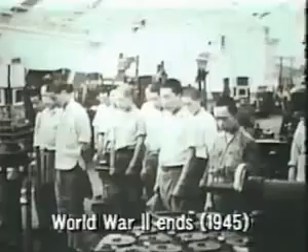After the war, Kiichiro passed on his dream to his cousin Eiji. He instructed Eiji to bring the company up to U.S. standards of technology within 3 years.

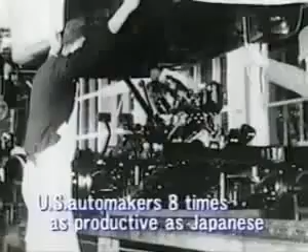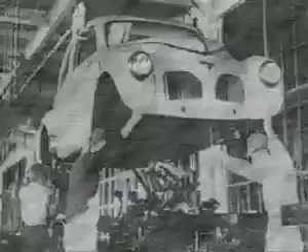That was a daunting task. U.S. productivity in automobile manufacturing was 8 times higher than Japan's, and Toyota was short of equipment and capital. So raising productivity was a pressing issue. Eiji assigned a machine shop manager by the name of Taiichi Ohno to develop a more efficient production system.

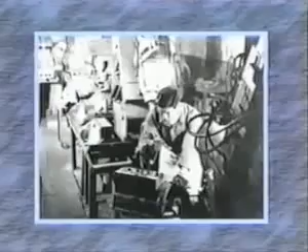The two men looked for ways to raise the value-added productivity of every worker. They did that by putting Sakichi's Jidoka concept to work throughout their operations. They also looked for other ways to stretch their limited resources of equipment and capital. They did that by putting Kiichiro's just-in-time concept to work systematically.

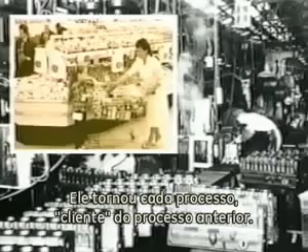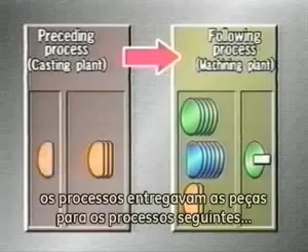Ohno took a cue from the U.S. supermarket. He made each process the customer for the preceding process. In traditional manufacturing, processes delivered parts to the following processes regardless of what was actually needed.

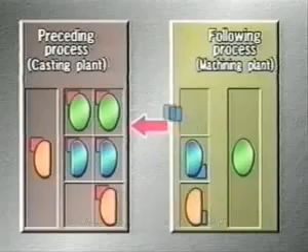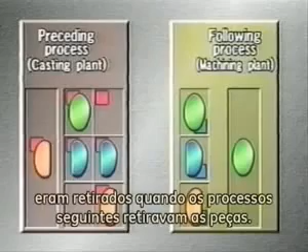Ohno devised a completely new kind of system. Processes used Kanban cards removed from parts they had consumed to withdraw parts from the preceding processes. Kanban on the parts arrayed by processes came off when the following processes withdrew the parts. They became instructions to make additional parts. The Kanban flow ensured that processes made parts only to replace parts actually consumed by the following processes.

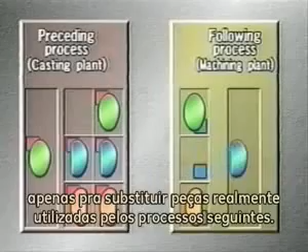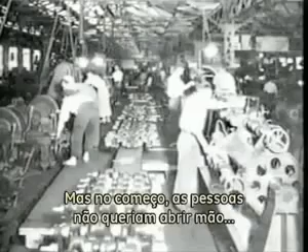Active cooperation by the people in the workplace would be essential to Ono's system. But at first, people were reluctant to give up their old ways of doing things. Ono took the initiative. He went into the workplace and taught people how to use his system. Eiji Toyoda supported Ono enthusiastically in putting the new production system in place.

A new production system gradually took shape on the foundation of just-in-time manufacturing and Jidoka intelligent automation. As the Toyota production system, it became a standard for manufacturing industries. The Toyota production system gained global attention after the oil crisis of 1973. Toyota recovered more quickly than other automakers from the crisis, and its production system received much of the credit for that resilience.

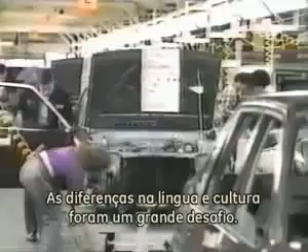General Motors Corporation approached Toyota about setting up a joint venture to make small cars in the United States. The two companies set up New United Motor Manufacturing Incorporated in California in 1984. Differences in language and culture presented big challenges, but the spirit of making things well knows no borders. People accepted the Toyota production system, and the Toyota-GM joint venture became the highest-ranked automobile plant in the United States for quality. It became a symbol of successful industrial cooperation between Japan and the United States.

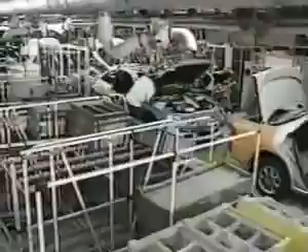A book published by the Massachusetts Institute of Technology hailed the Toyota production system as the machine that changed the world. Today, the Toyota production system has gained a worldwide following. Let's see how the system now operates in the world's most modern automobile plants.

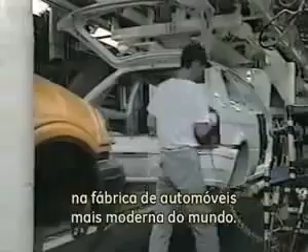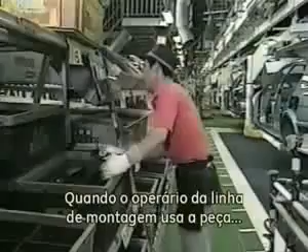The trucks that deliver parts to the plants carry a variety of items in each load. That allows each truck to travel fully loaded, which minimizes trips and thus reduces traffic congestion. Forklifts carry the parts unloaded from the delivery trucks to racks alongside the assembly lines. When people on the assembly line use the parts, they remove the attached Kanban cards. The Kanban get picked up regularly and sorted. The delivery truck drivers pick up the Kanban for their company or companies before leaving.

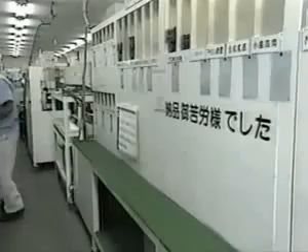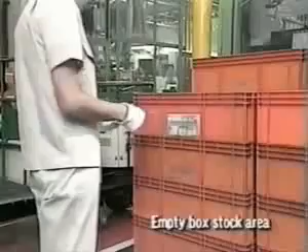Back at the supplier's plants, the Kanban become orders for withdrawing additional parts. Sorting arranges the Kanban according to area in the plant. Shipping personnel exchange the Kanban and empty boxes for full boxes. The production processes in the plant make additional parts only to replace parts that have been withdrawn. That prevents the wasteful buildup of inventories.

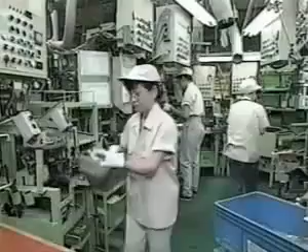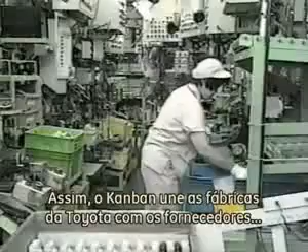When the shipping personnel have gathered a full truckload of parts, a truck carries the parts to the vehicle plant. Kanban thus link Toyota plants with suppliers' plants, as well as linking the processes inside the Toyota plants. Just-in-time manufacturing minimizes inventories, eliminates waste, and maximizes productivity at all the plants that participate in the Toyota production system.

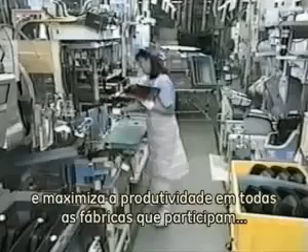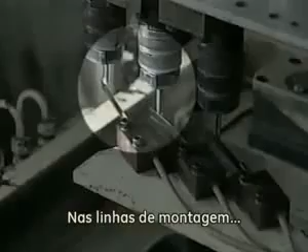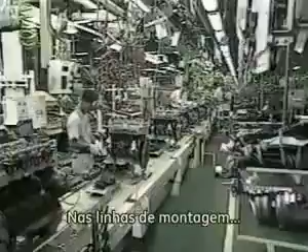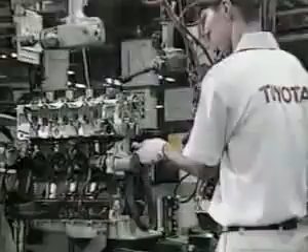Jidoka intelligent automation also continues to play a big role in the system. On automated machining lines, andon lamps light up to call attention immediately to any problems detected by sensors. On assembly lines, the employees themselves have devised countless Jidoka measures to prevent defective work. So Sakichi's concept continues to prevent waste. The idea is to build quality assurance into every process, and it works.

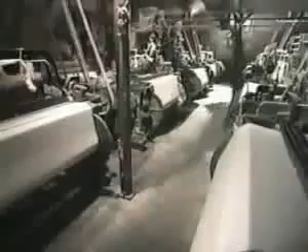The foundation for the Toyota production system has been established by Sakichi's Jidoka intelligent automation and his son Kiichiro's just-in-time manufacturing. Taiichi Ohno and others put those concepts to work systematically with the strong support of Eiji Toyoda and his passion for manufacturing.

The Toyota production system continues to evolve in response to changing needs and circumstances, but the fundamental concepts are eternal, including Toyota's commitment to continuing improvement in every phase of products and operations. Those concepts underlie a lasting contribution to enhancing the quality of life for people everywhere.